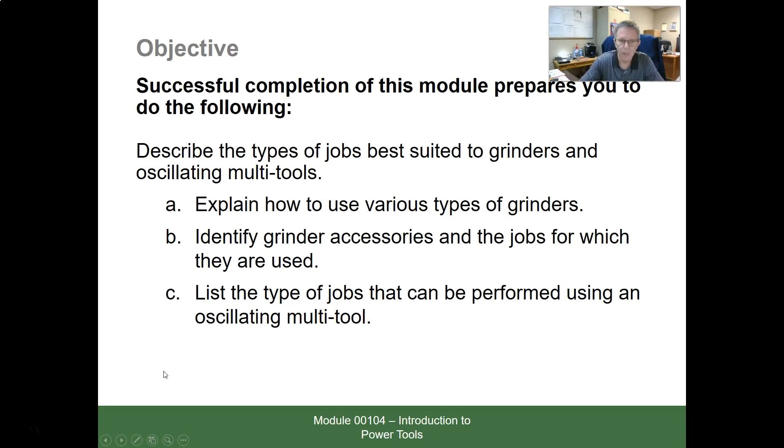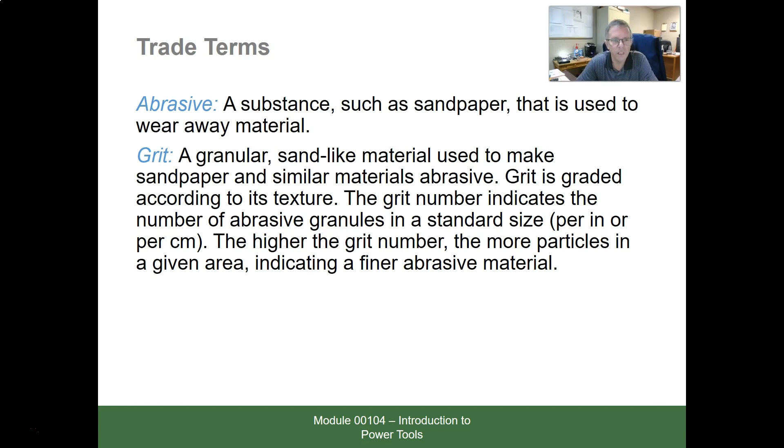Hey guys, let's look at module 00104 in the core curriculum. And in this part, we're going to be looking at section 3.0.0, grinders and oscillating multi-tools. Some trade terms you need to become familiar with. Please read over these.

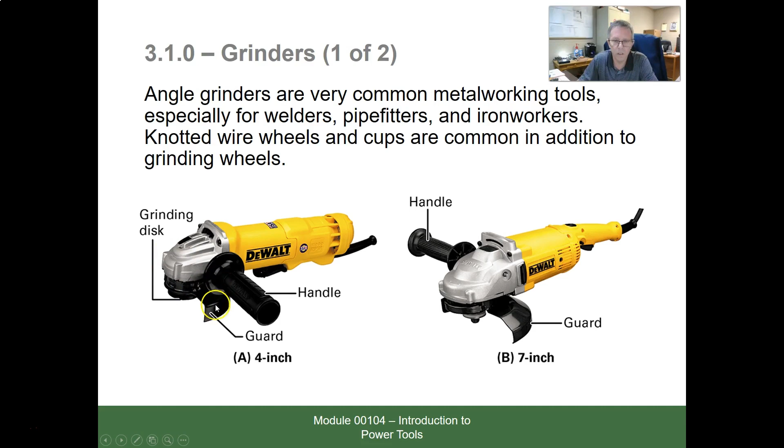Grinders. It says angle grinders are very common metalworking tools, especially for welders, pipe fitters, and iron workers. Knotted wire wheels and cups are common in addition to grinding wheels. All right, so the main things with our grinders, they have a lot of RPM. They spin the disc around. We need to make sure all the guards are there and in place, and make sure the handles are there in place.

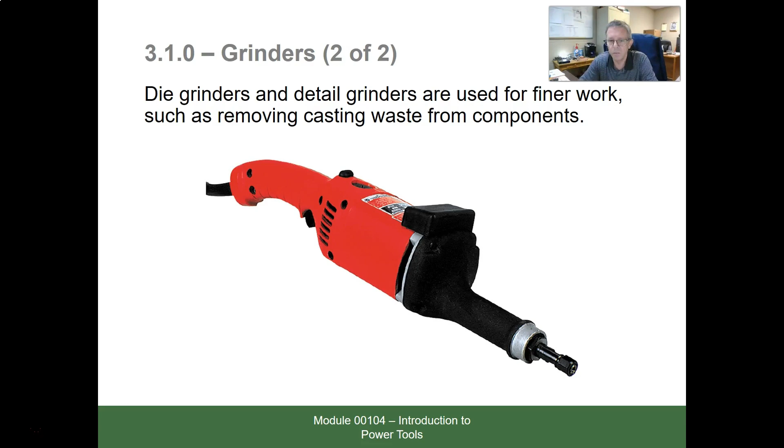A die grinder and detail grinders are used for finer work, such as removing casting waste from components. And it says a face shield should be worn with all grinders, and then you should wear safety glasses under that face shield. It says the maximum RPM of the grinding wheel must be greater than or equal to that of the grinder. So our grinder is going to spin at a certain RPM, and our wheel is going to be rated for certain RPMs. We've got to make sure the wheel that we put on is equal to or has a higher RPM rating than the grinder. If it has a lower rating, then we've got a chance of it breaking, shattering, coming apart.

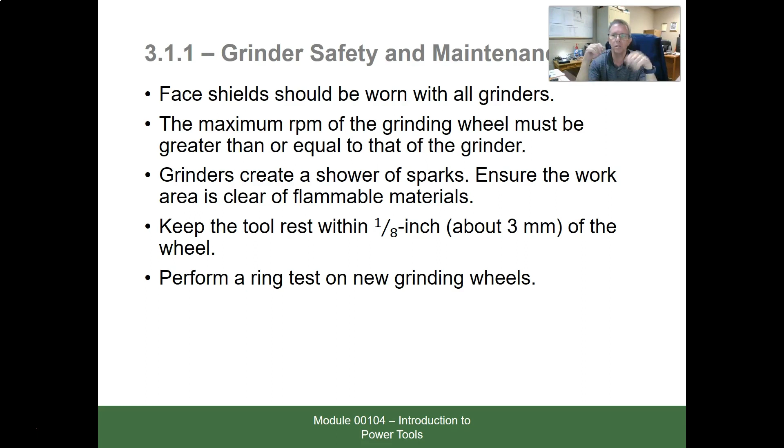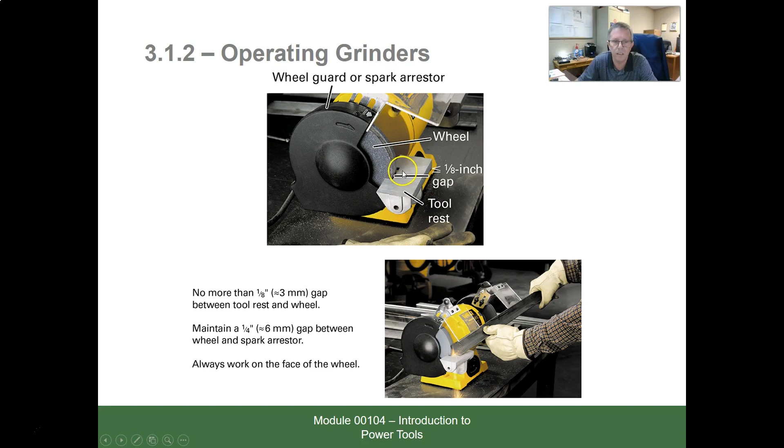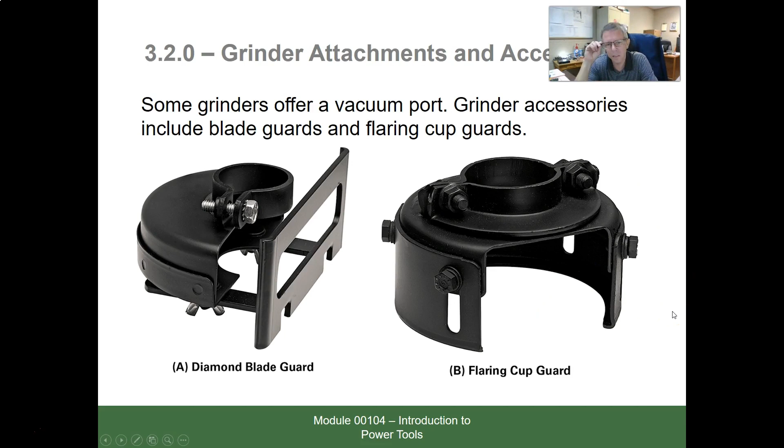All right. It says grinding attachment accessories. Some grinders offer a vacuum port. Grinding accessories include blade guards and flaring cup guards. Diamond blade guard, flaring cup guard. Remember, if they're there, they've got to be in good working order, and they've got to be on the tool. Oscillating multi-tool. It says oscillating multi-tools can perform a variety of jobs as the result of arbors that accept many different attachments and accessories.

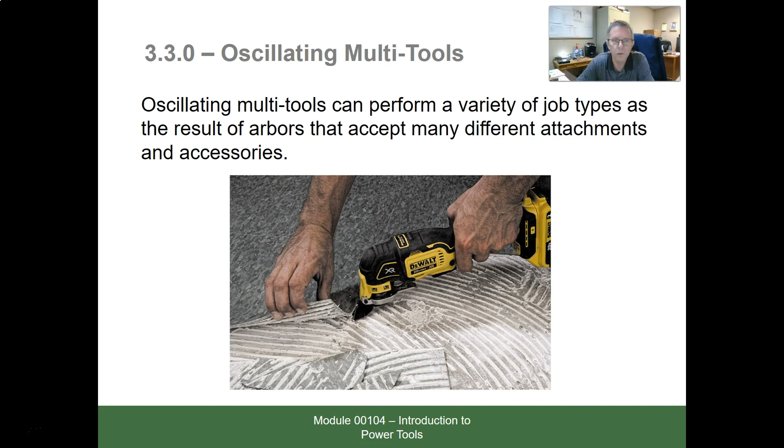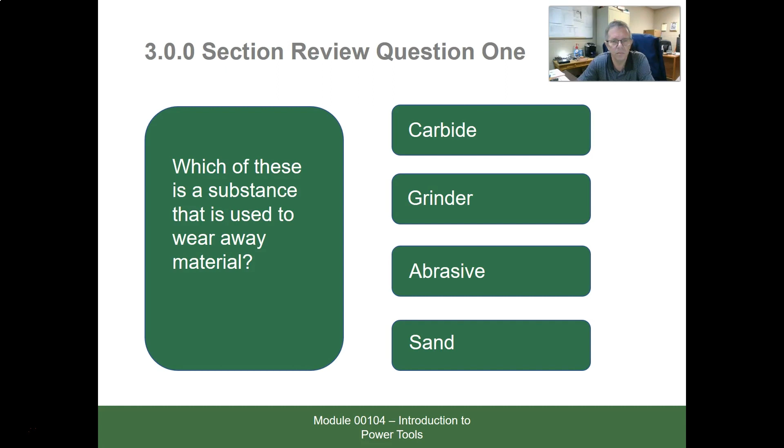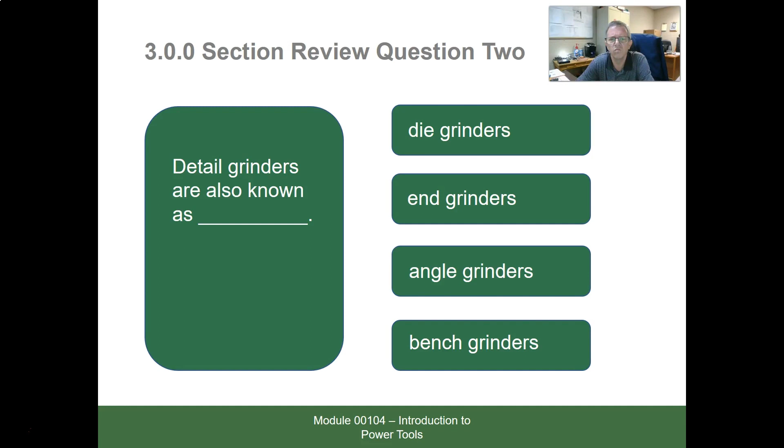All right. And then we'll have some review questions for this section. It says, which of these is a substance that is used to wear away material? Carbide, grinder, abrasive, or sand? We're going to say abrasive. Detail grinders are also known as die grinders, end grinders, angle grinders, or bench grinders. I'm going to say die grinders. Okay. Detail grinders offer more power than an end grinder. No, that's false.

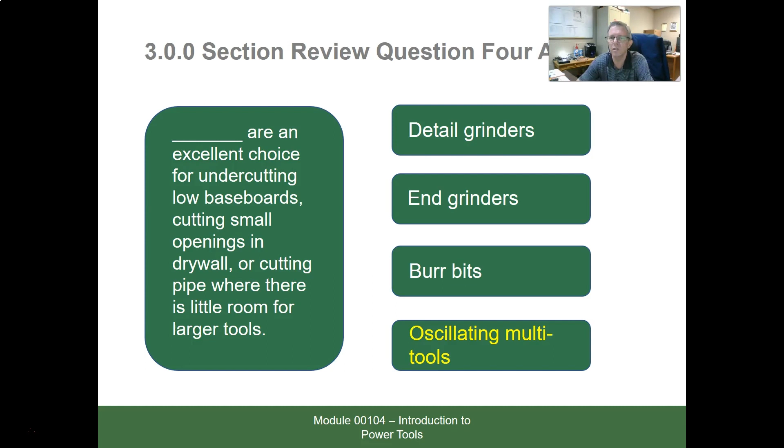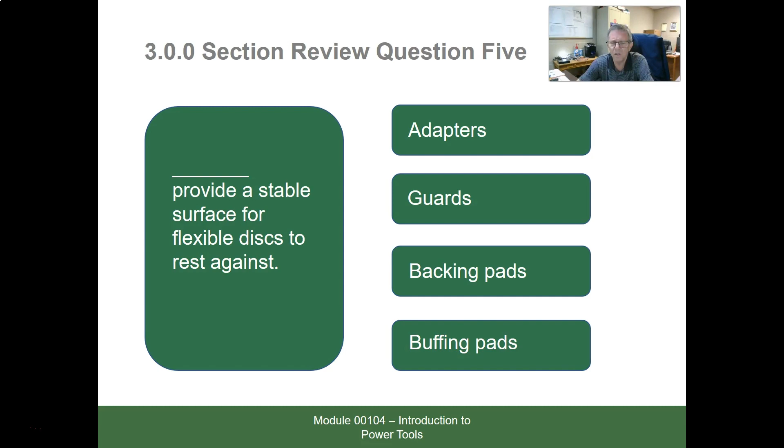Blank are an excellent choice for undercutting low baseboards, cutting small openings in drywall, or cutting pipe where there is little room for larger tools. Is that detail grinders, end grinders, burr bits, or oscillating multi-tools? That's going to be that oscillating multi-tool we just talked about. All right, then it says blank provides a stable surface for flexible discs to rest against. Adapters, guards, backing pads, or buffing pads. Those are going to be backing pads.

All right, the next section will be 4.0.0 miscellaneous power tools, and I will see you over there.